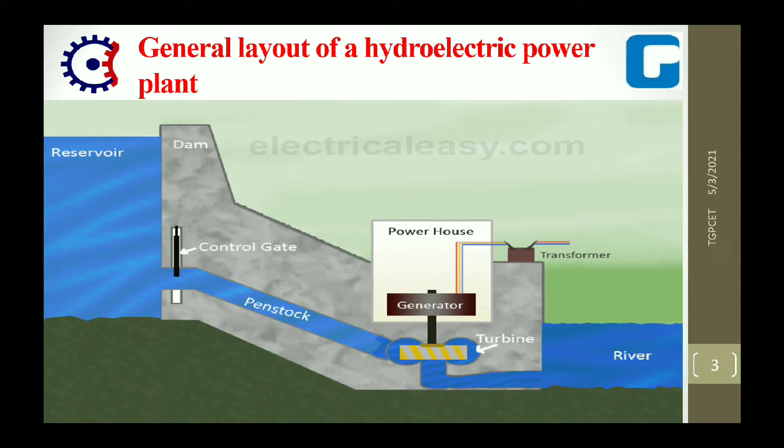In this photo we can see the reservoir, dam, control gate, penstock, power house which contains a generator, turbines, and river and transformer. Now here is the schematic diagram of a layout of hydroelectric power plant. This hydroelectric power plant would be converting the potential energy of water which is stored at considerably high level into

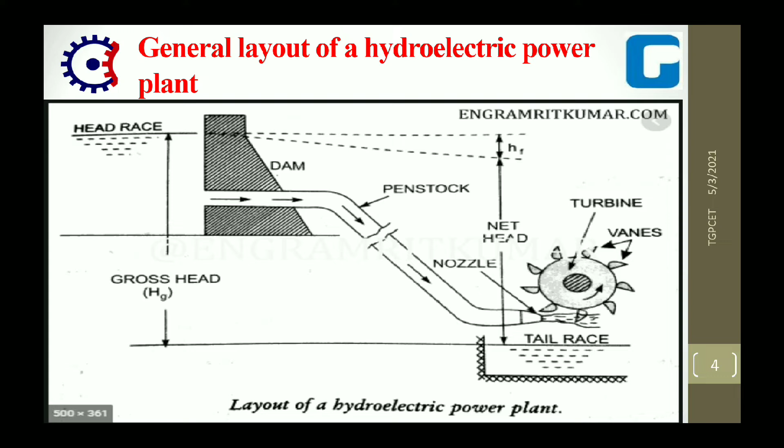Now the concept is, the more the gross head value, the more amount of work we are going to get. Here we can see HF. HF is the head loss due to the friction. The difference between gross head and friction head, we get net head. Next, the dam is connected with the help of this pipeline called a penstock.

We can see here a penstock, and through this penstock water goes inside the runner with the help of nozzle, and it impacts on runner blades. After that we have a turbine runner, and because of the high velocity impact of water, the runner starts to run and creates energy, that is our mechanical energy. And by using generator, mechanical energy can be converted into electrical energy.

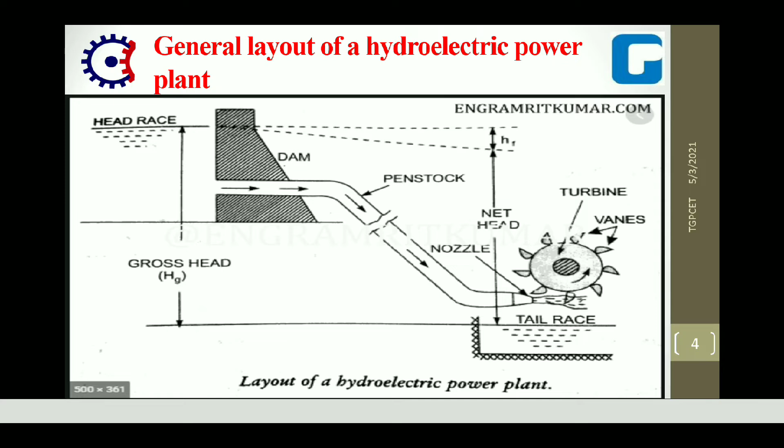water. Okay, now see some parts of the hydroelectric power plant. First is reservoir.

Reservoirs ensure supply of water throughout the year by storing water during rainy season and supplying the same during dry season. Second is the dam. The function of dam is to increase the reservoir capacity and to increase the working head of the turbine.

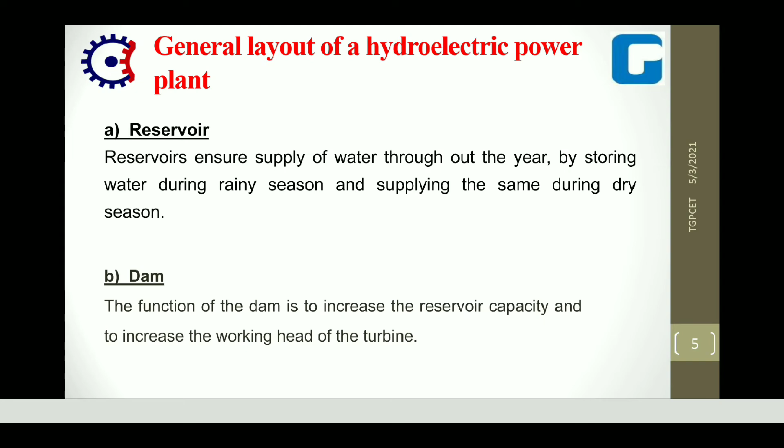Okay, now third is penstock. A pipe between dam and turbine, as we know, is known as penstock. It will carry the water from dam to turbine. Penstock is commonly made of steel pipes covered with RCC. And fourth is surge tank or forebay.

When the rate of water flow through the penstock is suddenly decreased, the pressure inside the penstock will increase suddenly due to water hammer and thereby damage the penstock. Surge tank or forebay is constructed between the dam and turbine. It will act as the pressure regulator during variable load.

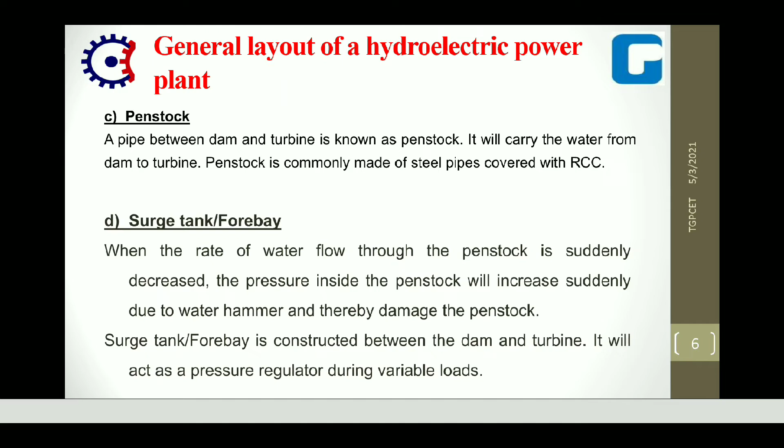Now turbines. Turbines convert the kinetic and potential energy of water into mechanical energy to produce electric power. And last is generator and transformer.

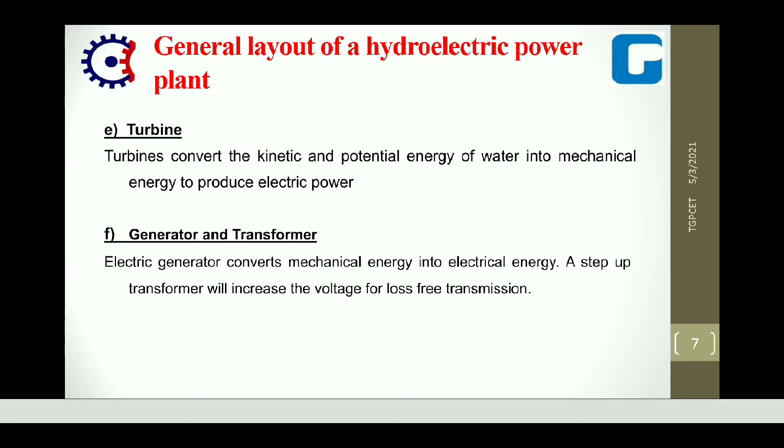Electrical generator converts mechanical energy into electrical energy. A step-up transformer increases the voltage for loss free transmission. There are some advantages of hydroelectric power plants.

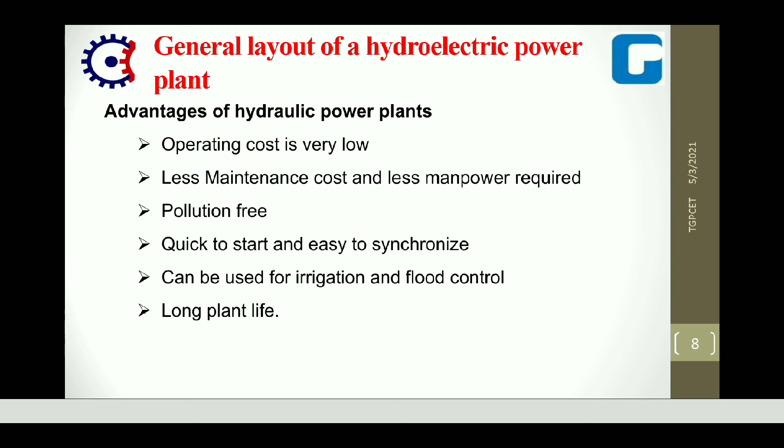First is operating cost is very low. Okay. Second is less maintenance cost and less manpower required. Third is pollution free. Fourth is quick to start and easy to synchronize. And then it can be used for irrigation and flood control, and long plant life. These are all the advantages of hydroelectric power plant.

And there are some disadvantages of hydroelectric power plants. First is initial cost of total plant is comparatively high. Second is power generation depends on availability of water. Third is cost of transmission is high since most of the plants are in remote areas. And last is project duration is long. Okay, these are all the disadvantages of hydroelectric power plant.

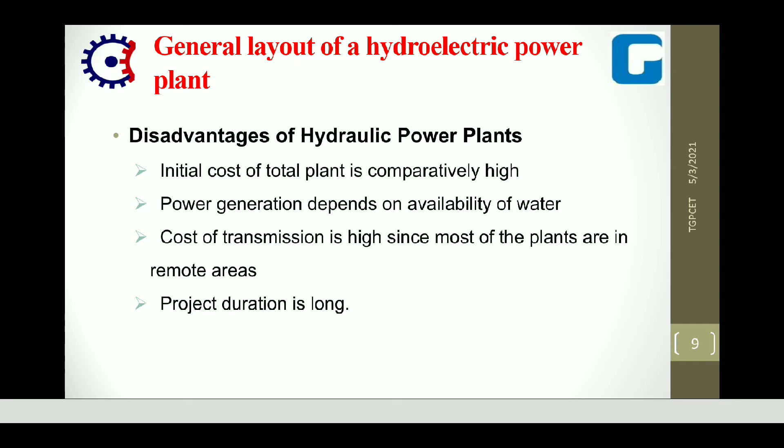Now gross head. As we know, the distance between tail race and head race is the gross head. The formula for gross head is static head, total head H1, and net or effective head. That is, what is net or effective head? Head available at the entrance of the turbine, that is H1 minus HF, where H1 is the gross head and HF is the head loss.

See here, net head for reaction turbine. We know the types of turbines: there are reaction turbines and impulse turbines. Net head for reaction turbine formula is here: H equals pressure head plus velocity head plus datum head, minus datum head at point 2 plus velocity head at point 2. And second, the net head for impulse turbine is H equals pressure head plus velocity head plus datum head at point 1 minus datum head at point 2.

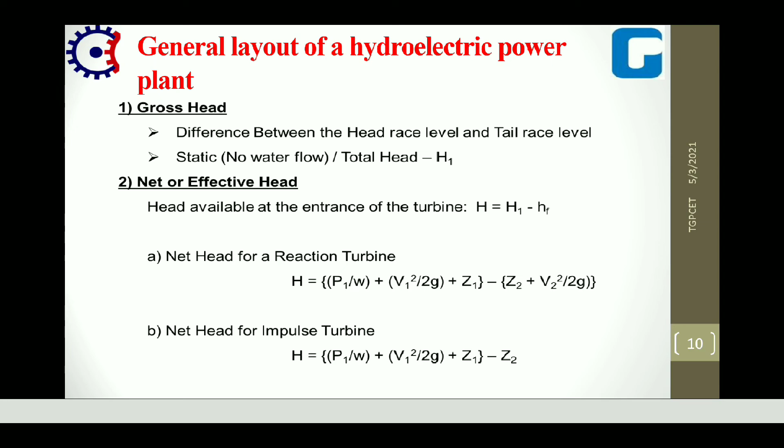See here the efficiency. Hydraulic efficiency comes because of hydraulic losses. The ratio of power developed by the runner to the net power supplied at the turbine entrance is hydraulic efficiency. The SI unit is kilowatt. Actually kilowatt is for the power developed by runner or power supplied; the SI unit kilowatt is only for power, and the metric unit is horsepower or water horsepower.

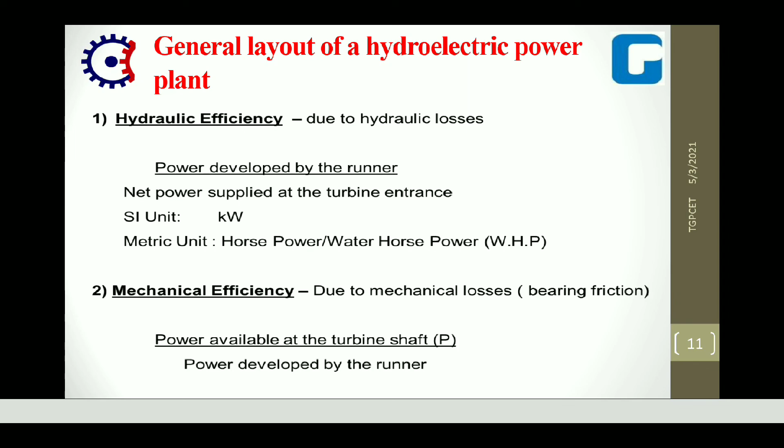Now mechanical efficiency. Due to mechanical losses, the ratio of power available at the turbine shaft and power developed by the runner is the mechanical efficiency. And volumetric efficiency is created due to amount of water slipped directly to the tail race. The ratio of amount of water striking the runner to the amount of water supplied to the turbine is the volumetric efficiency.

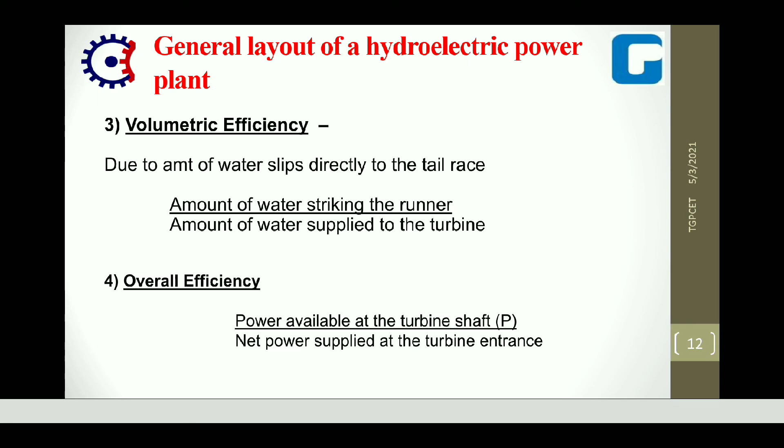Overall efficiency is the power available at the turbine shaft and net power supplied at the turbine entrance. Okay, overall efficiency is the ratio of power available at the turbine shaft and net power supplied at the turbine entrance. This is all about hydroelectric power plant and their efficiencies, net head, gross head.